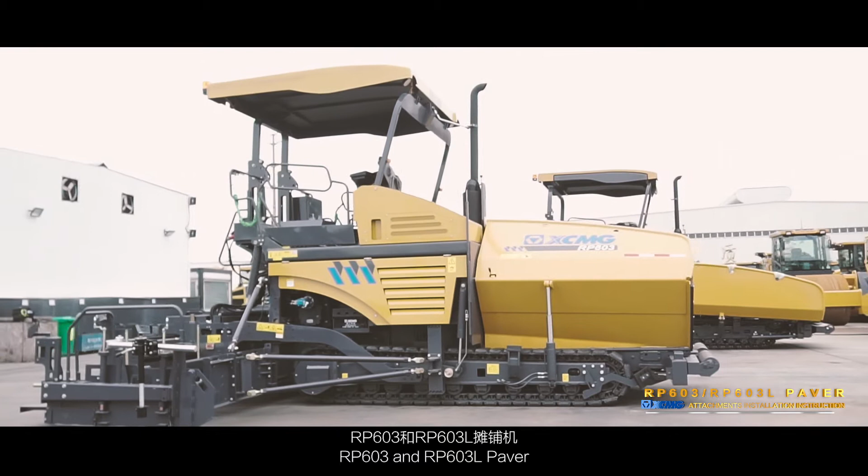Attachments Installation Instruction of XCMG PAVER RP603L. RP603 and RP603L PAVER use XCMG E475T hydraulic screed, which can be installed with bolt-on extensions as well as various optional attachments to achieve two kinds of paving width ranges, including 2.5 meters to 4.75 meters and 3.75 meters to 6 meters.

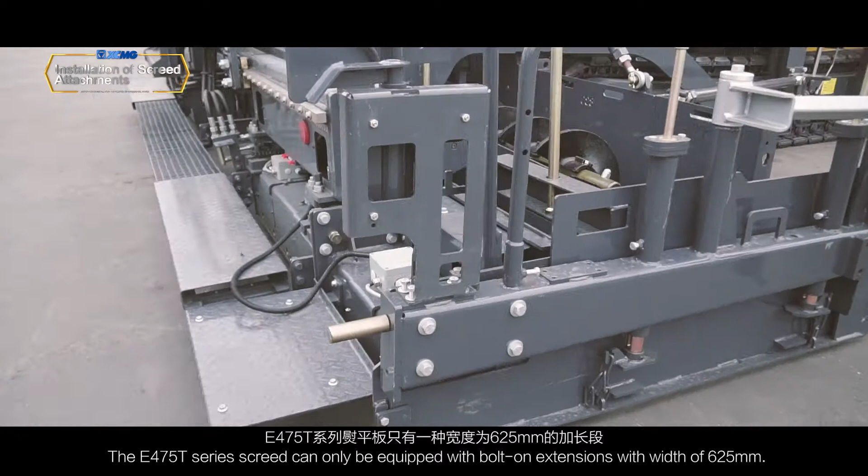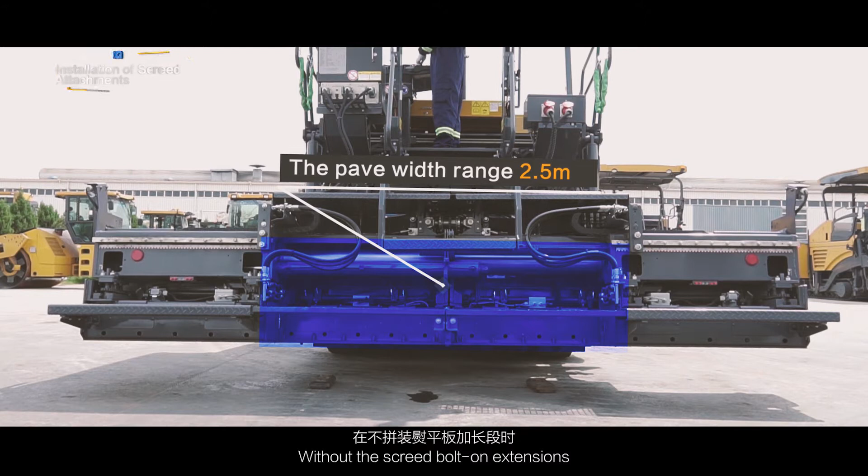Installation of screed attachments. The E475T series screed can only be equipped with bolt-on extensions with width of 625 millimeters. These 625 millimeter extensions can be installed on both right and left side of the main screed. Without the screed bolt-on extensions, the pave width range is from 2.5 meters to 4.75 meters.

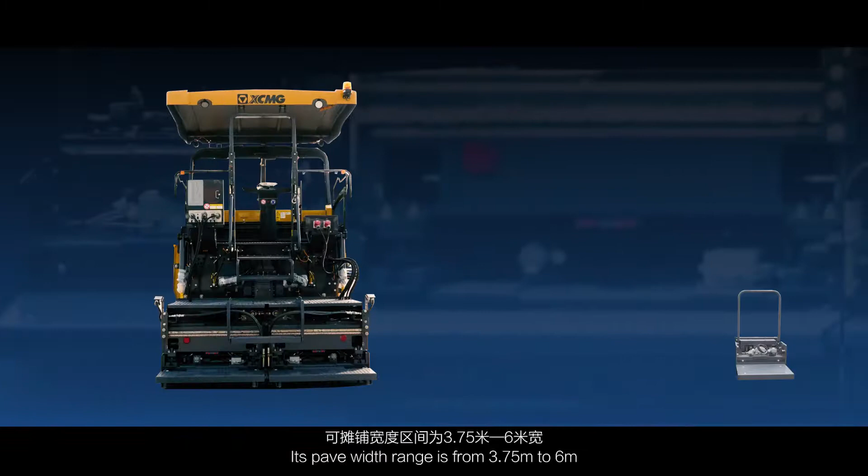E475T screed can reach maximum pave width of 6 meters with bolt-on extensions. Its pave width range is from 3.75 meters to 6 meters. Select screed extensions and related attachments according to required pave width.

Installation of screed bolt-on extensions. Stretch out the hydraulic extensions completely and lift the screed plate to about 3 centimeters above the ground and put wooden board under it. Ensure that the extension is only affected by its own gravity during the installation of screed extensions in order to facilitate the height adjustment of the screed base plate.

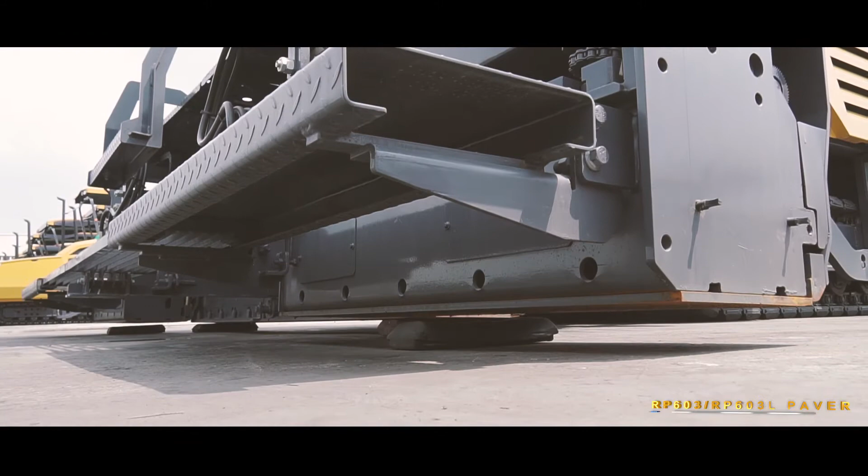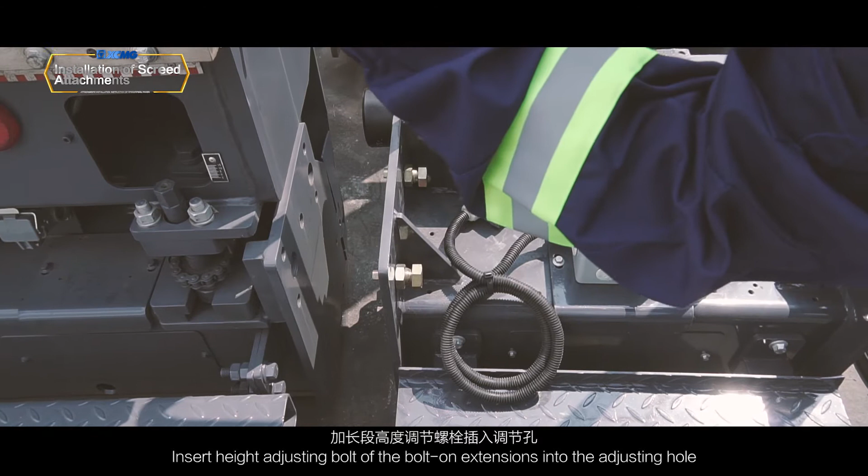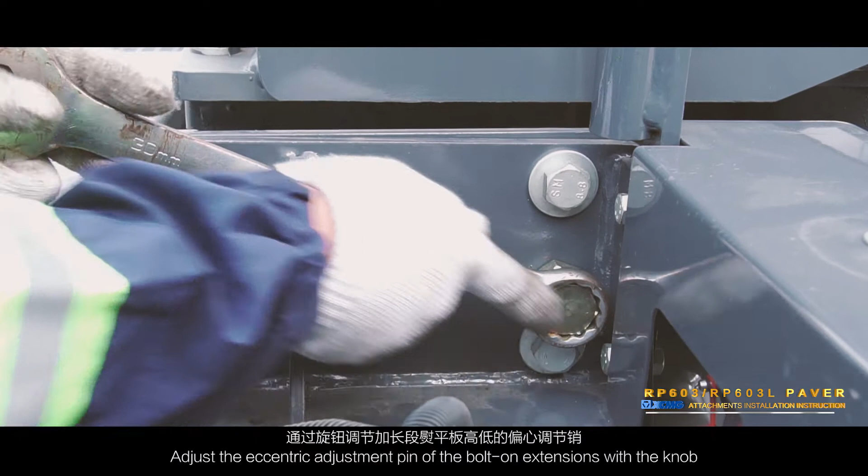Adjust the eccentric adjustment pin of the bolt-on extensions with the knob, so that bolt-on extensions are on the same plane as the front and rear base plate of the hydraulic extensions. Finally, tighten all the bolts which connect the bolt-on extensions and the hydraulic extensions.

Caution: due to different using frequency of the bolt-on extensions and hydraulic extensions, there will be thickness difference caused by the wear of base plate. Thus, it is necessary to compensate the thickness difference by adjusting the height adjustment device of the bolt-on extensions. Replace the failed screed base plate in time.

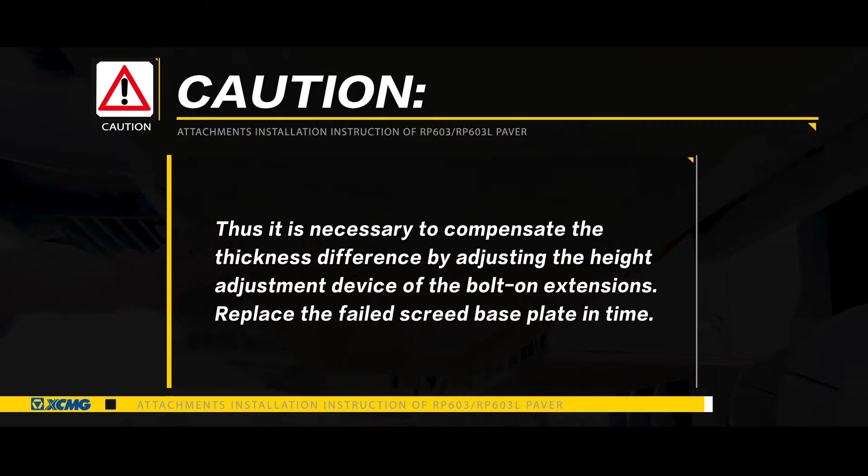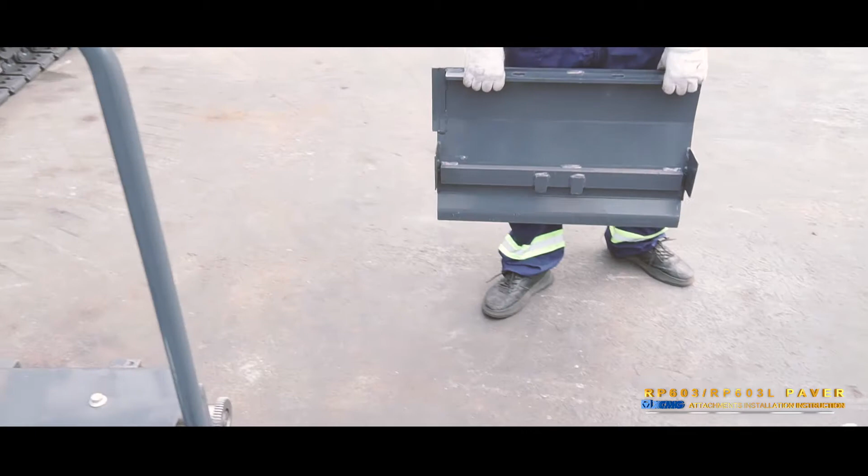Align the marking arrow on the nylon sleeve on the bolt-on extensions with the gap in the gear ring on the hydraulic extensions by turning the vibration shaft of the bolt-on extensions. Push the nylon sleeve inward to engage with the gear ring until the spacer pin pops out. Front baffle installation.

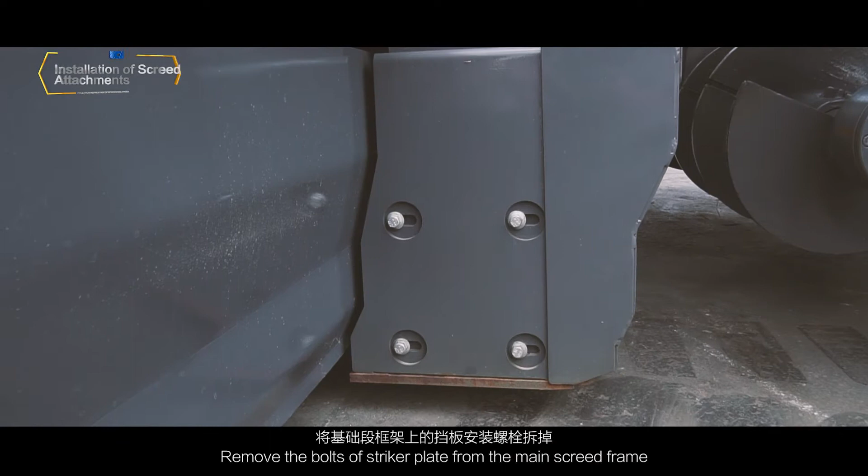Insert the plug of the electric heating cable on the screed into the electric heating socket on the hydraulic extensions and make it tight. Installation of striker plate. Remove the bolts of striker plate from the main screed frame.

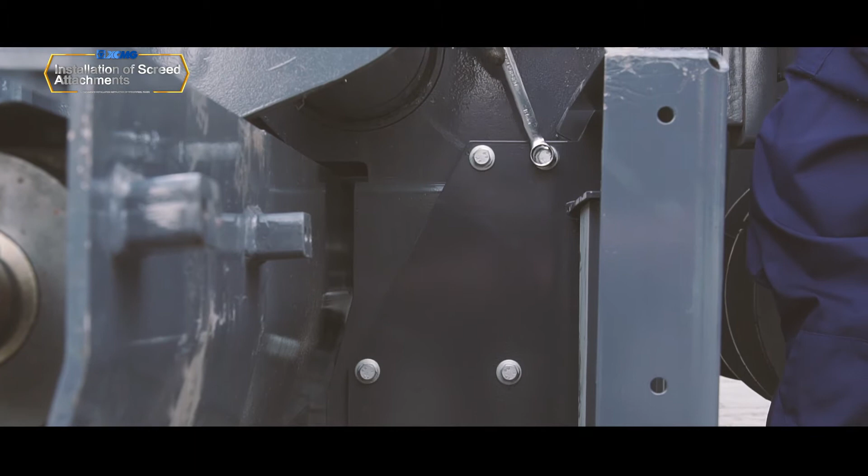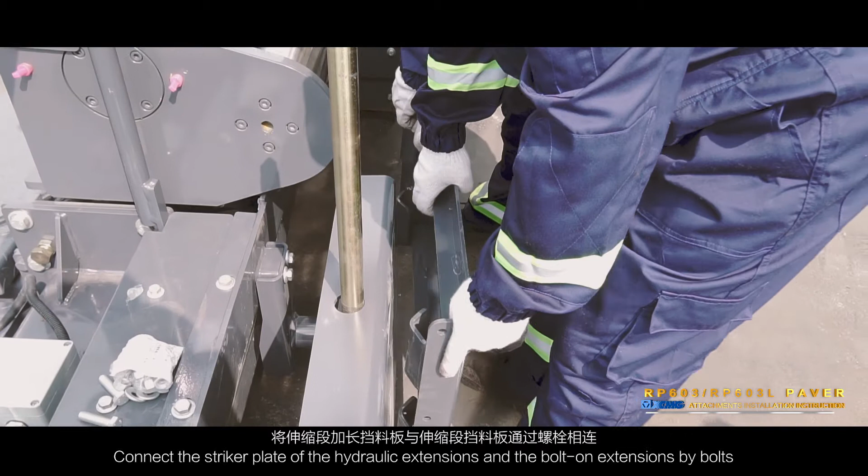Connect the striker plate of the hydraulic extensions to the frame of the main screed by bolts. Connect the striker plate of bolt-on extensions to the front plate of the bolt-on extensions by bolts. Connect the striker plate of the hydraulic extensions and bolt-on extensions by bolts. Demonstration of screed extension operation.

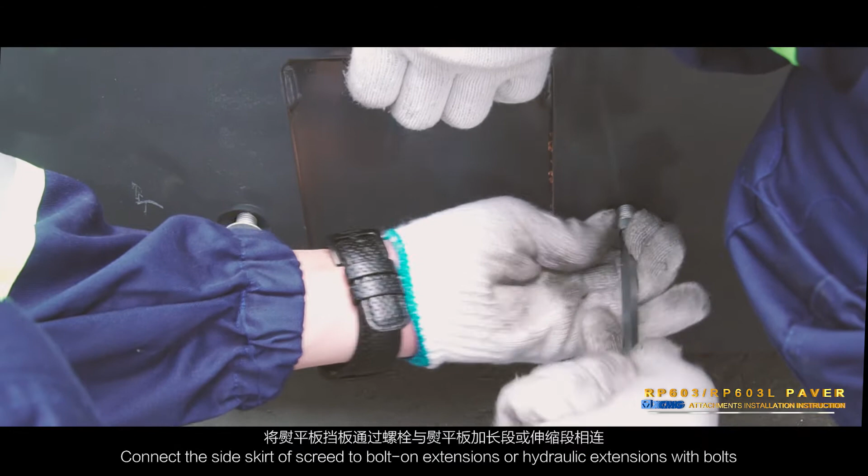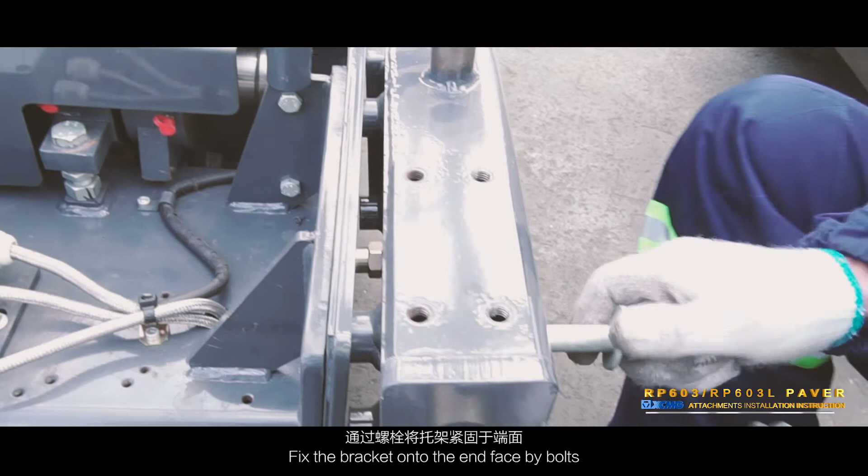Installation of the side skirt and bracket. Connect the side skirt of screed to bolt-on extensions or hydraulic extensions with bolts. Engage the bracket into the end face of the bolt-on extensions or hydraulic extensions through the hitch pin on it. Fix the bracket onto the end face by bolts.

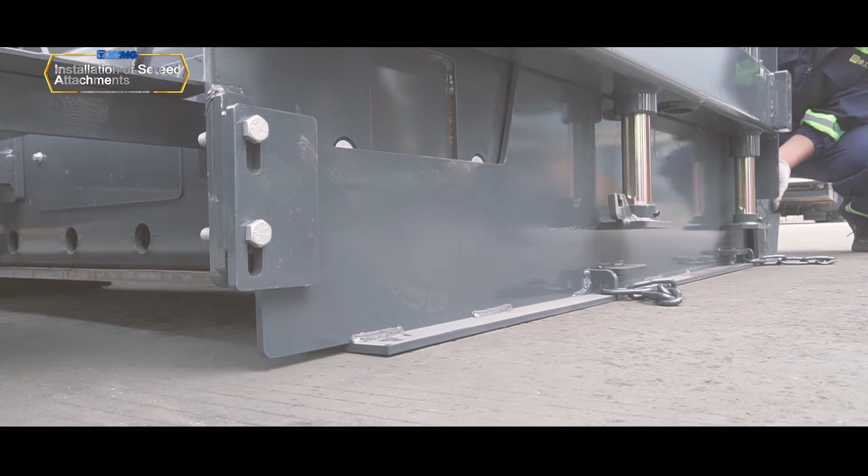Connect the installation slot pad with the bolt-on extensions or hydraulic extensions by bolts. Push the side skirt from front of bracket into bracket chute. Attach the chain to the adjustable chain holder on the bracket. The height of the movable side skirt can be adjusted by turning the rotary adjusting handle above the chaining seat.

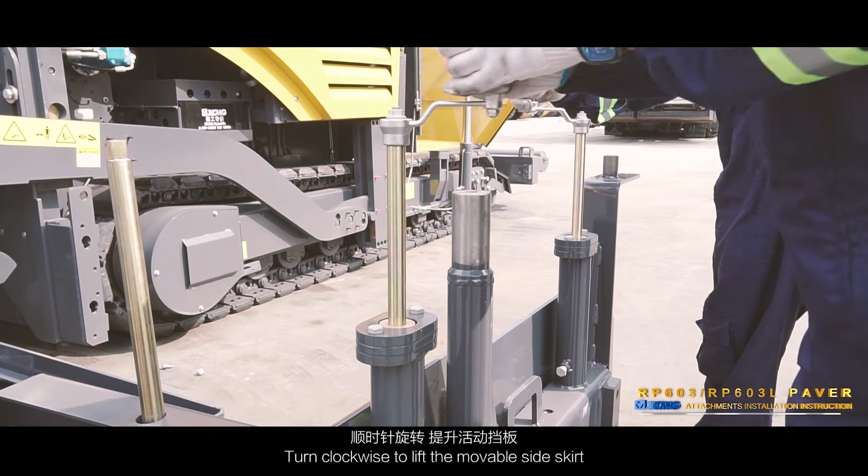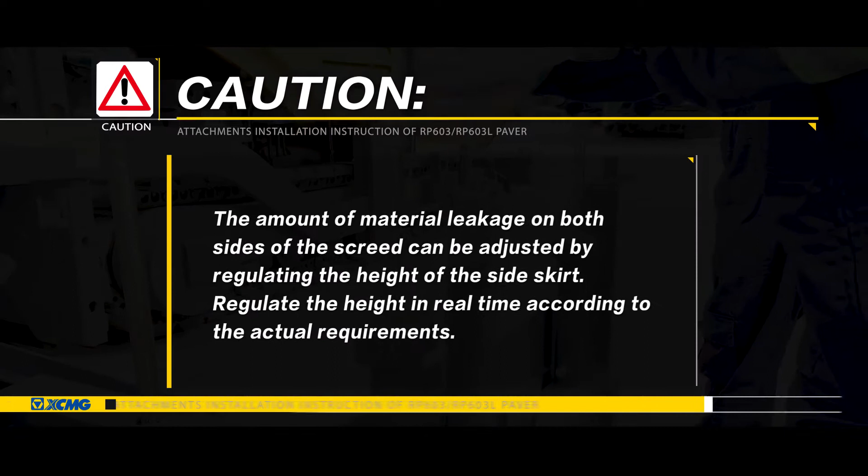Turn clockwise to lift the movable side skirt. Turn counterclockwise to lower the movable side skirt. Fix the rotary adjusting handle by adjusting the top thread. Caution: the amount of material leakage on both sides of the screed can be adjusted by regulating the height of the side skirt. Regulate the height in real time according to the actual requirements.

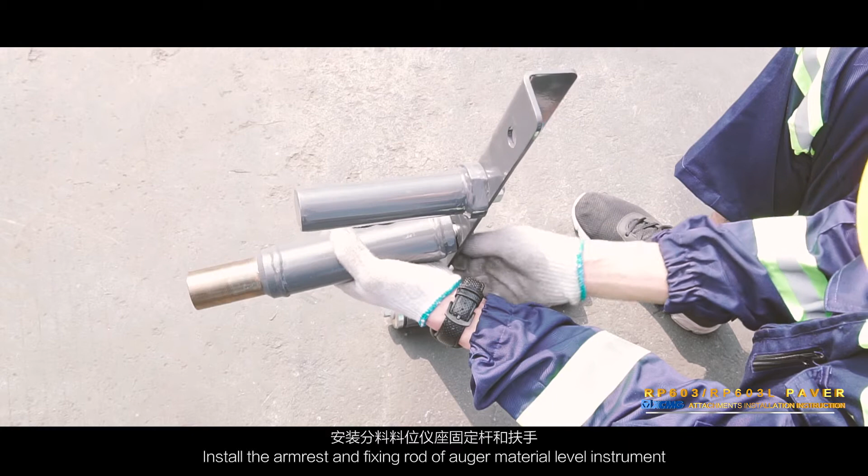Install the armrest and fixing rod of auger material level instrument. Remove the fixing rod from the material level instrument assembly frame. Screw the screws at the bottom of the rod into the mounting screw holes in the front of the bracket and tighten them. Insert the armrest into the corresponding plug and bolt it. Connect screed control box holder to the rear part of the bracket by screws.

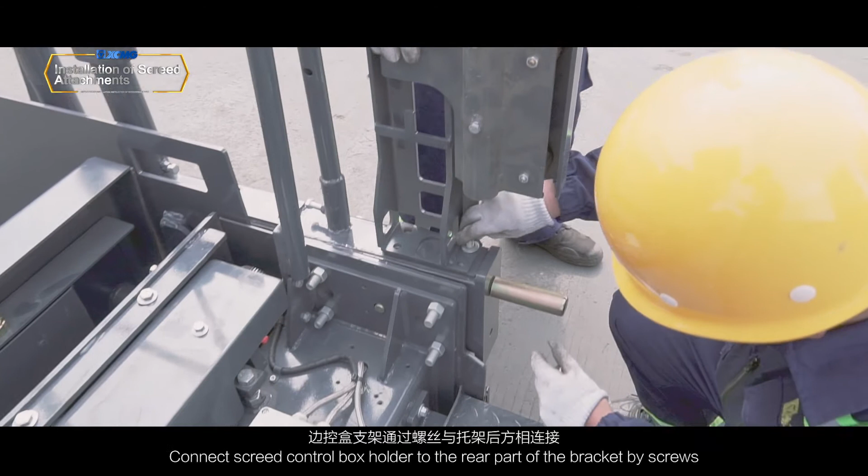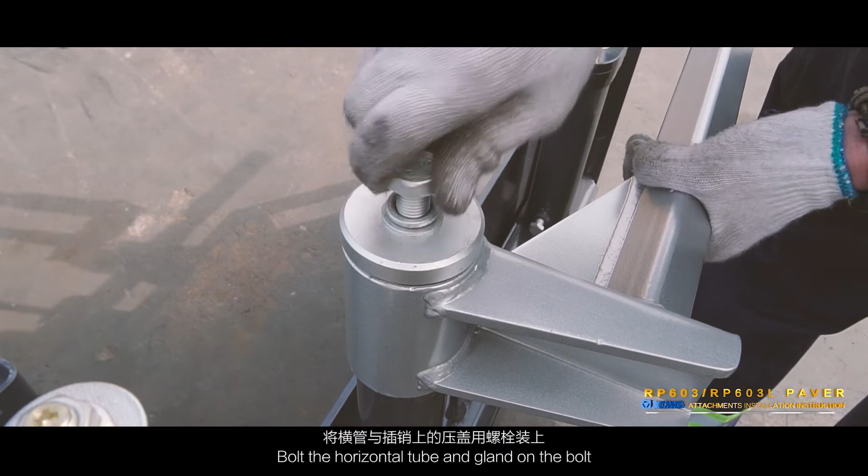Place the horizontal tube on the corresponding plug on the bracket. Make sure that the horizontal tube faces forward and can be turned towards the outside of the Screed. Bolt the horizontal tube and gland on the bolt. Adjust the gland tightness by adjusting the bolts. Let the horizontal tube at a suitable rotational tightness.

Caution: the tightness of the horizontal tube of leveling instrument shall keep the leveling instrument firm under Screed vibration. The horizontal tube can be rotated manually to adjust the relative position of the leveling instrument and the leveling reference when necessary.

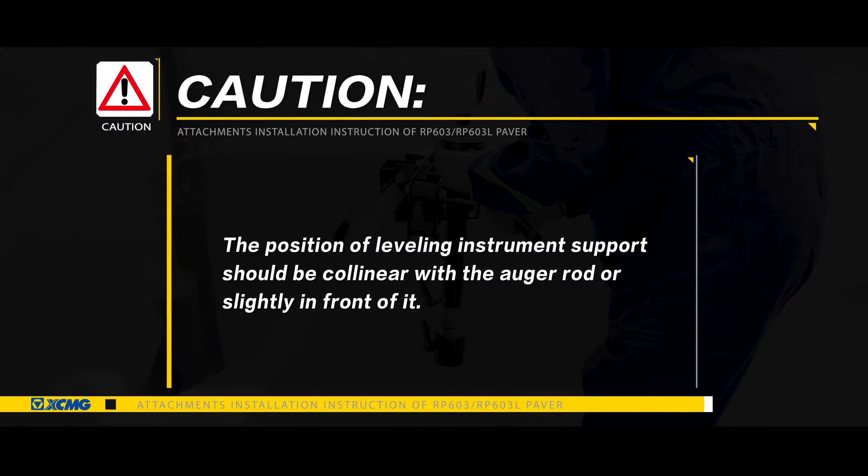Install the leveling instrument support on the horizontal tube of the leveling instrument, and fix it by the rocker handle. Caution: the position of leveling instrument support should be collinear with the Auger rod or slightly in front of it.

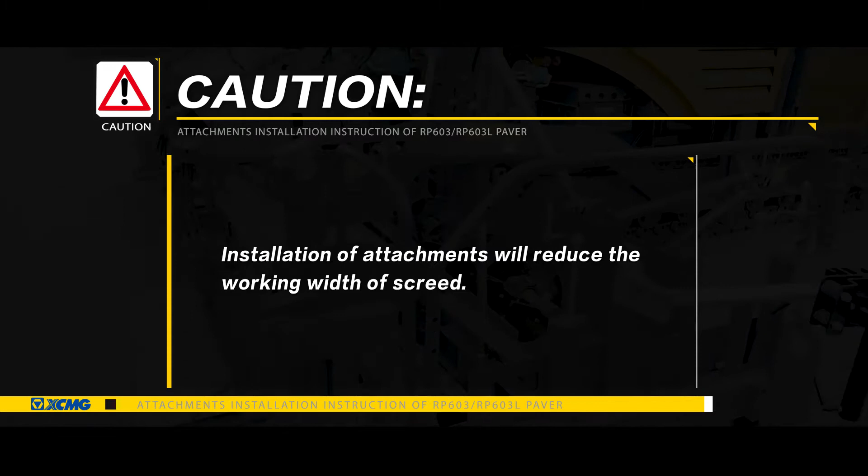Installation of PAVER attachments. Select PAVER attachments based on the actual width. Caution: installation of attachments will reduce the working width of Screed. Attachments installation for pave width of 4.75 meters to 6 meters.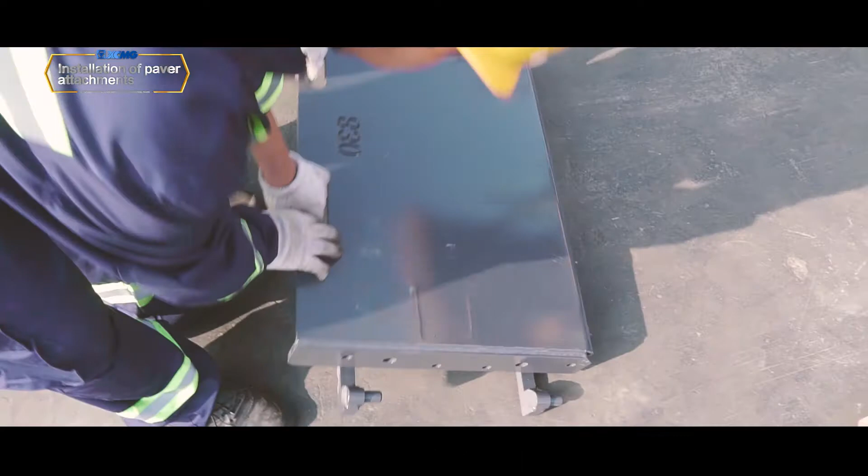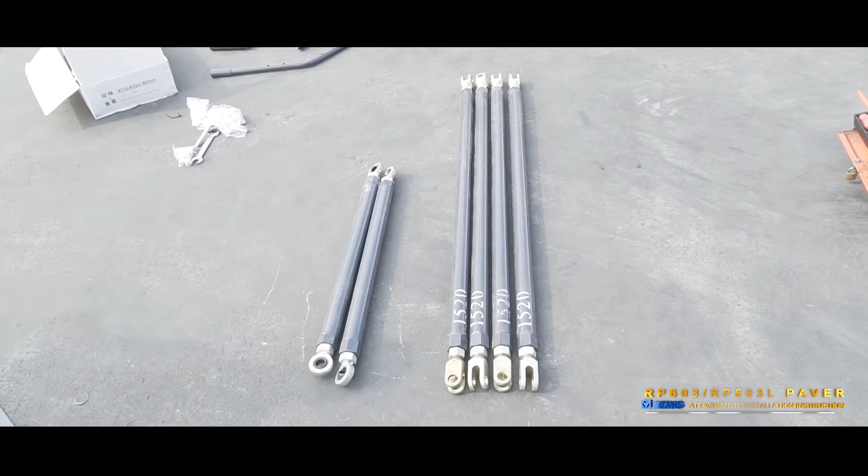Auger rod configuration: auger rod of main Screed, 750 mm lengthening shaft, 1202 mm lengthening shaft. Baffle plate configuration: transition baffle plate, 830 rotary baffle plate, 250 mm front baffle plate, 500 mm front baffle plate. Pull rod configuration: horizontal pull rod, side pull rod.

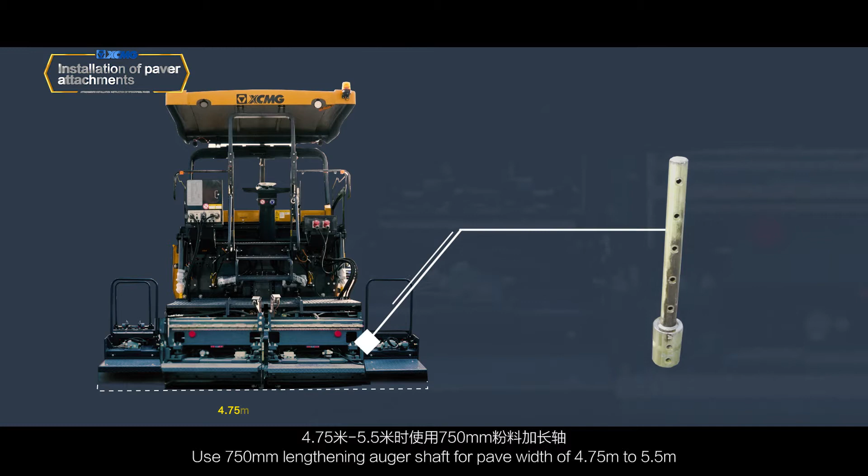Select and install the lengthening auger shaft according to the actual pave width requirements. Use 750 mm lengthening auger shaft for pave width of 4.75 meters to 5.5 meters. Use 1202 mm lengthening auger shaft for pave width of above 5.5 meters. Remove the fan blades and axle shaft sleeve at the end of the auger rod of main Screed.

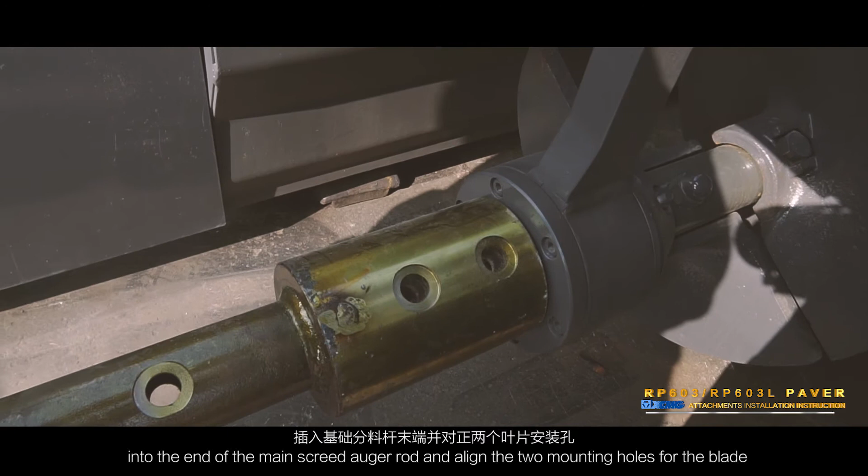Insert the thicker and hollow end of the selected lengthening auger shaft into the end of the main Screed auger rod and align the two mounting holes for the blade. Install the blades of lengthening auger shaft. Install the AR42-1 bridge blades on the connection between right lengthening auger shaft and main Screed auger rod with bolts.

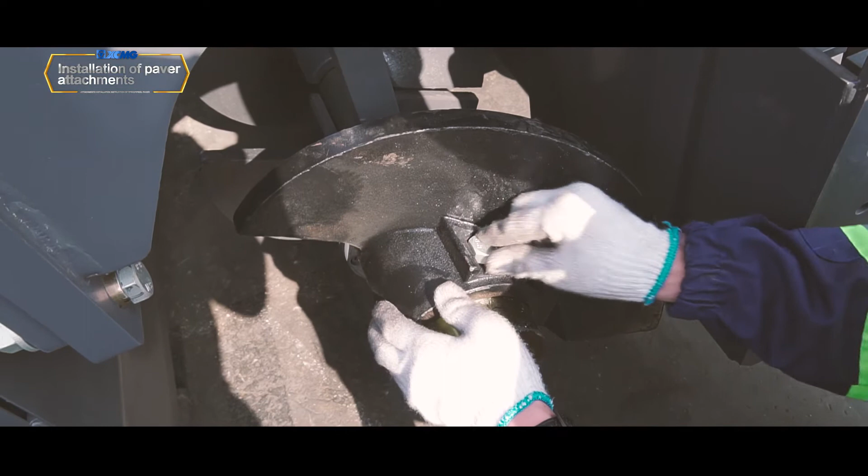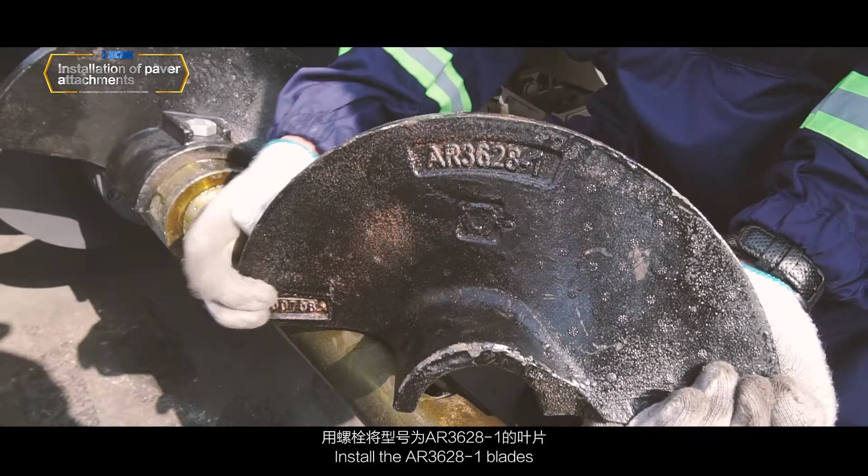Install the AR42-1 bridge blades on the connection between left lengthening auger shaft and main Screed auger rod with bolts respectively. Caution: the model mark shall face inward. Install the AR3628-1 blades separately in the remaining positions of the right lengthening auger shaft.

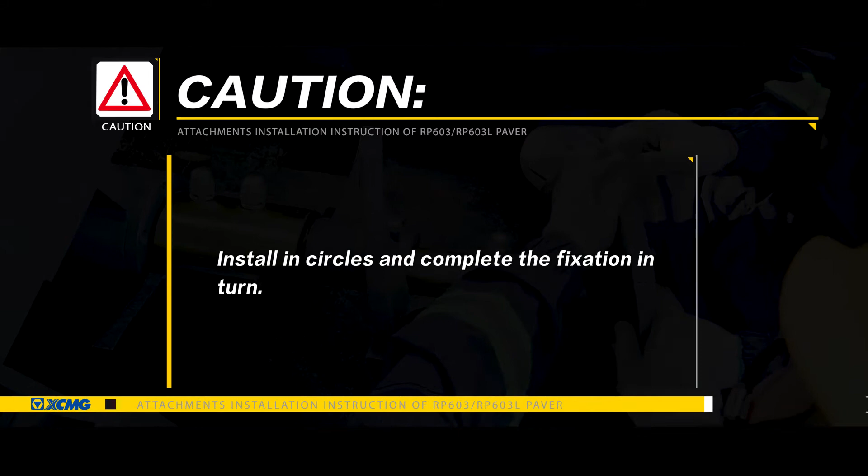Install the AL3628-1 blades separately in the remaining positions of the left lengthening auger shaft. Caution: install in circles and complete the fixation in turn. Hook the 830 mm rotary front baffle plate hook to the transition baffle and install it with bolts. Install the tie rod holder.

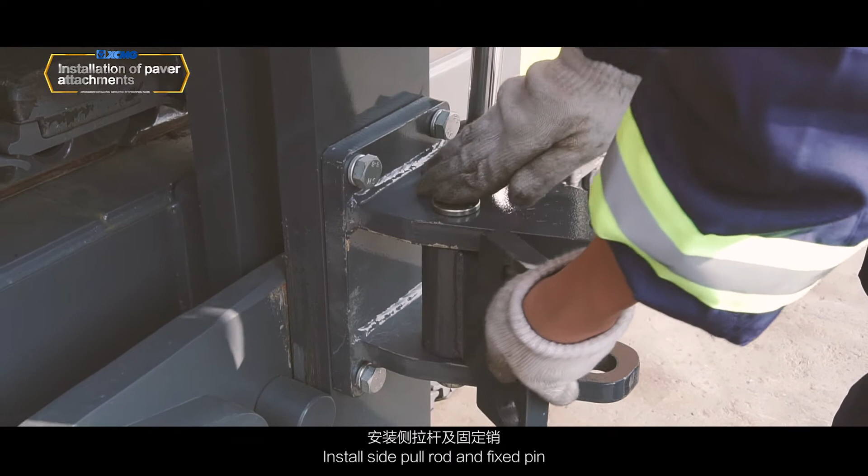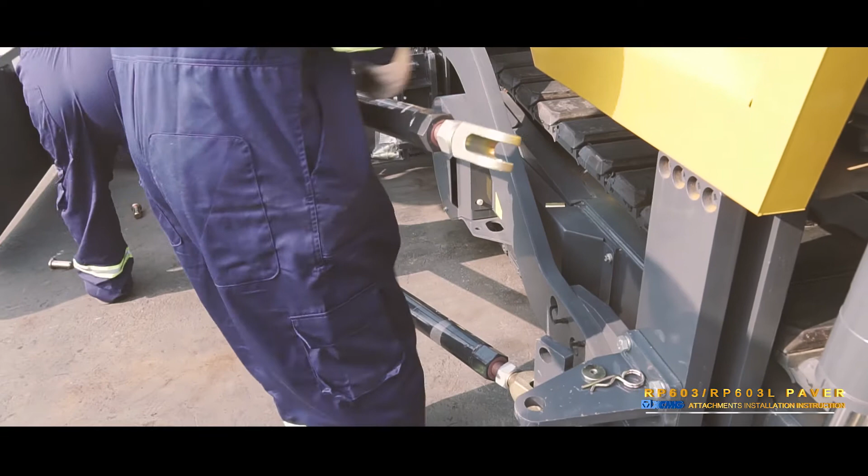Install side pull rod and fixed pin. Caution: the fixing pins are installed with self-locking nuts, and the direction of the fixing pins should be the same as the direction of the fixing pins on the PAVER.

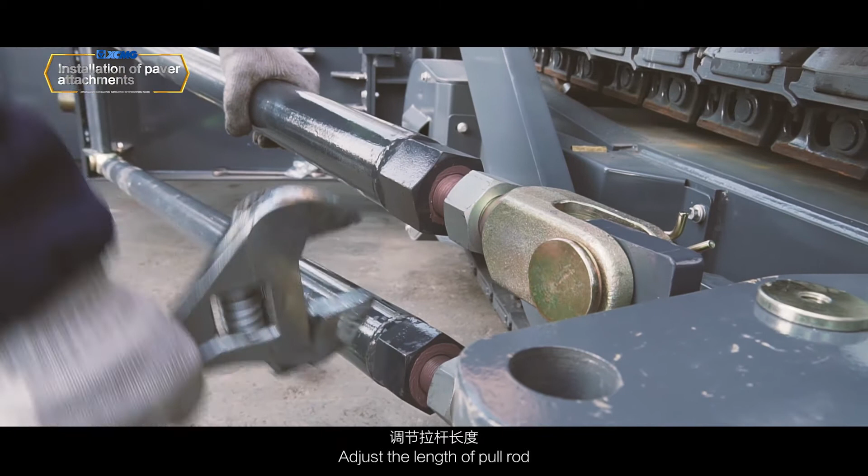Adjust the length of pull rod. Make the front striker plate in a level position with uniform force. Tighten the length adjustment enclosed bus bar of the pull rod. Install horizontal pull rod and fixed pin.

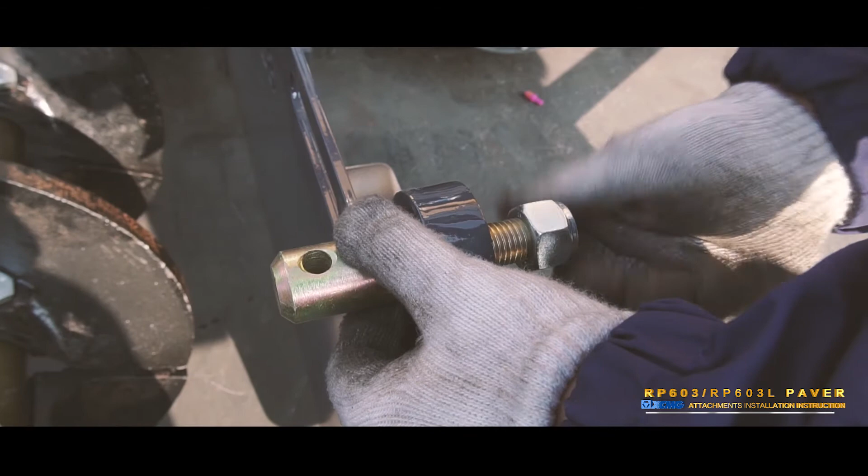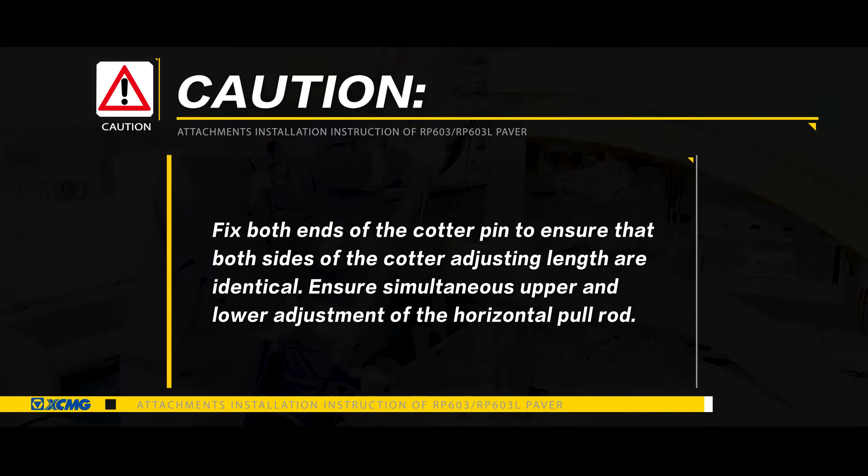And adjust the length of the pull rod. Caution: fix both ends of the cotter pin to ensure that both sides of the cotter adjusting length are identical. Ensure simultaneous upper and lower adjustment of the horizontal pull rod. Ensure identical front and rear width of the front material groove, and that the groove is in a level position with uniform force. Tighten the length adjustment enclosed bus bar of the pull rod.

According to the actual pave width requirement, select whether to install 250mm, 500mm front baffle plate or not. Install and fix them to the 830mm rotary baffle with bolts.

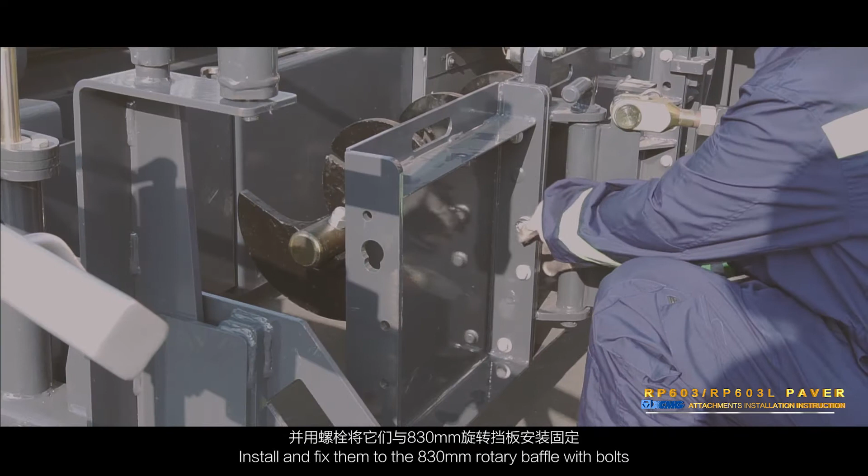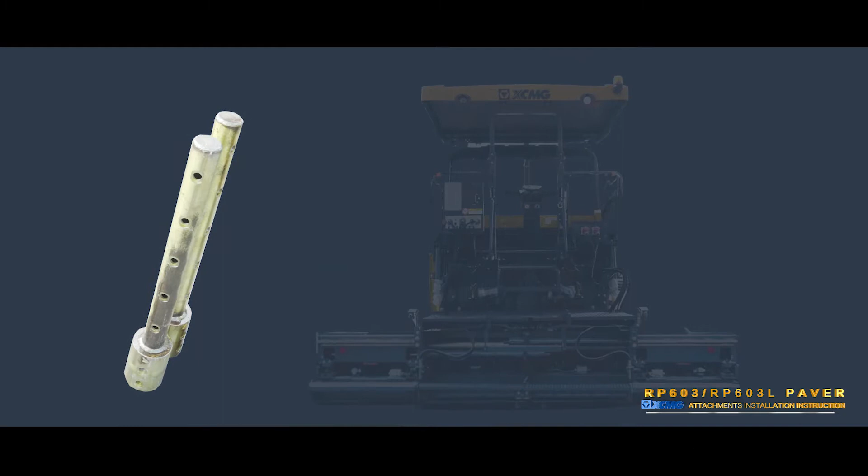Attachments installation for paving 2.5 to 4.75 meters. Auger rod configuration: auger rod of main screed, 500mm lengthening shaft or 750mm lengthening shaft. Baffle plate configuration: transition baffle plate, 250mm front baffle plate, 500mm front baffle plate.

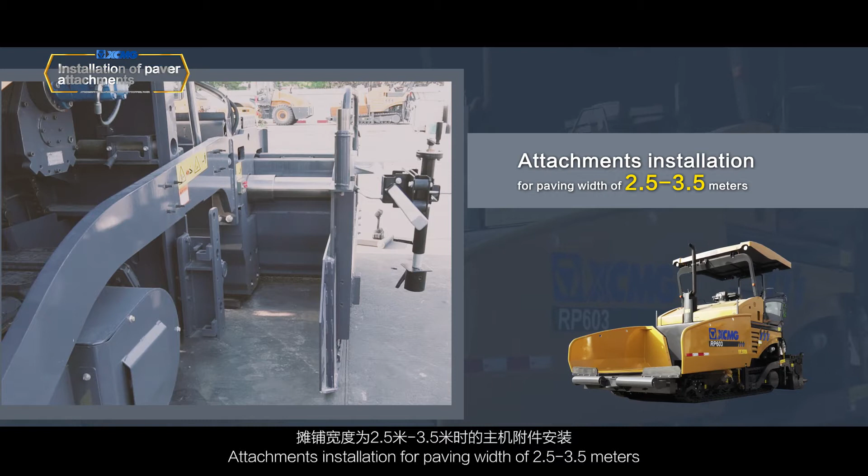Attachments installation for paving width of 2.5 to 3.5 meters. In this case, no need to install paver attachments. Attachments installation for paving width of 3.5 to 4 meters. In this case, a 250mm front baffle shall be installed.

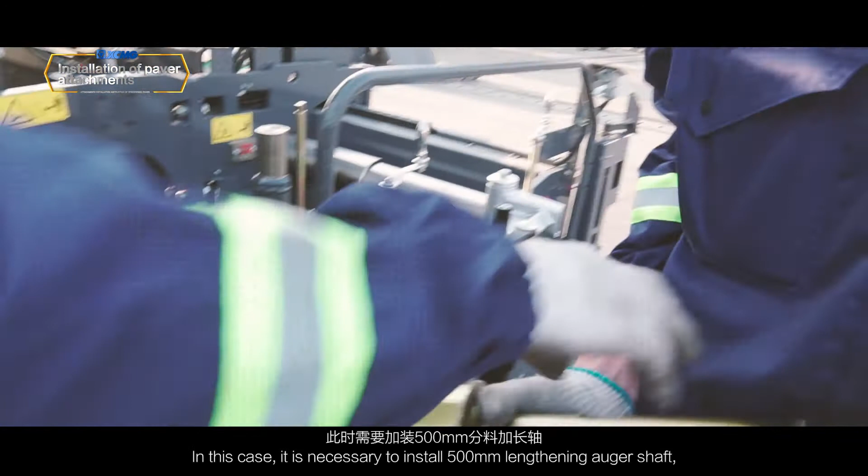Attachments installation for paving width of 4 to 4.5 meters. In this case, it is necessary to install 500mm lengthening auger shaft, hydraulic extensions, 500mm front baffle plate.

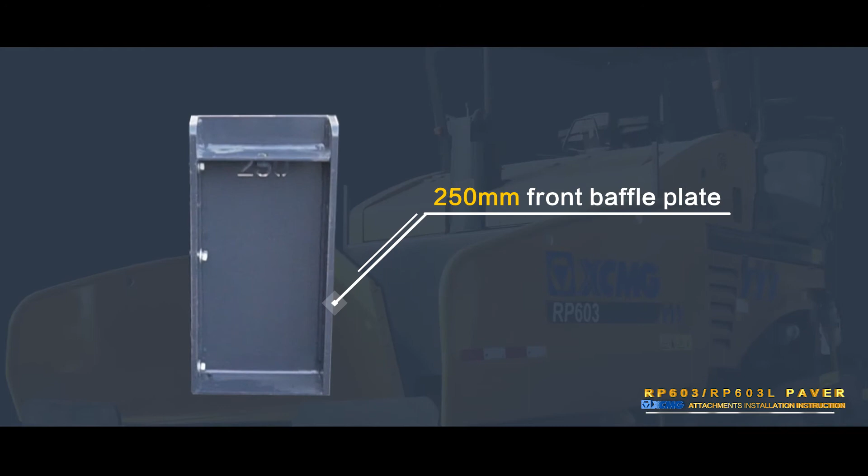Attachments installations for pave width of 4.5 to 4.75 meters. In this case, it is necessary to install 500mm lengthening auger shaft or 750mm lengthening auger shaft, 250mm front baffle plate, and 500mm front baffle plate and striker plate of hydraulic extensions.

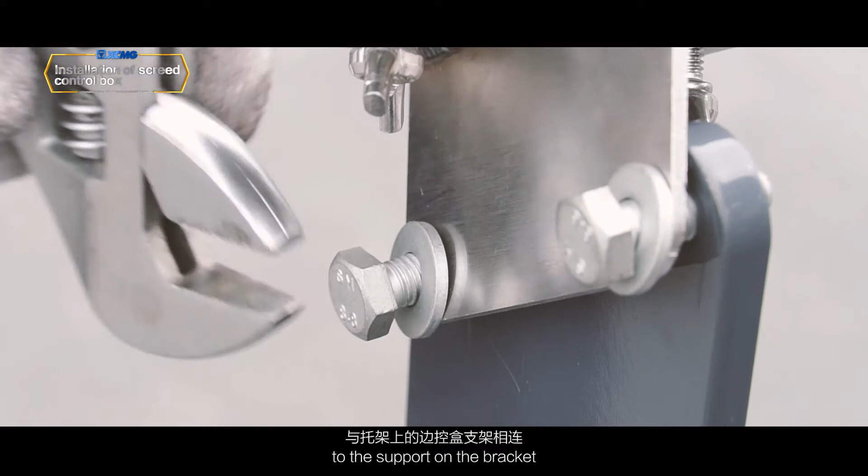Installation of Screed control box. Bolt the fixed plate of Screed control box to the support on the bracket. Insert the Screed control box into the fixed plate and adjust the top thread under the fixed plate to secure the Screed control box. Connect the Screed control box to the socket connector on the hydraulic extensions via the connecting wire.

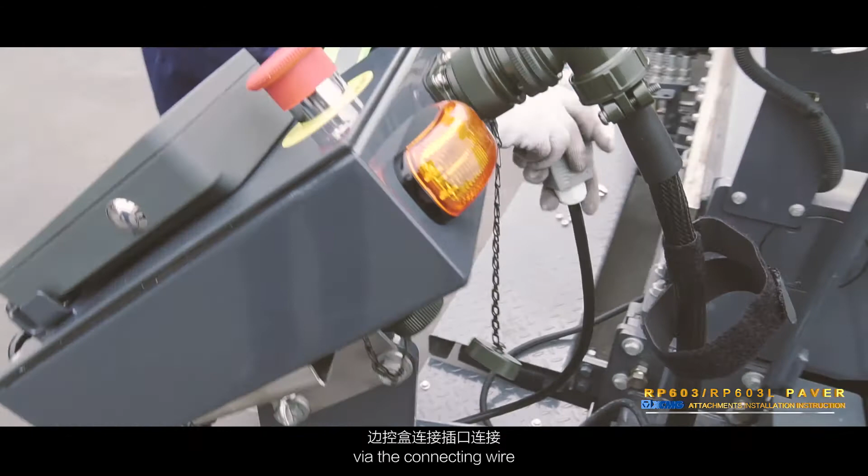Caution: the disassembly and assembly of the Screed control box can only be carried out while the machine powers off. Avoid loose connection.

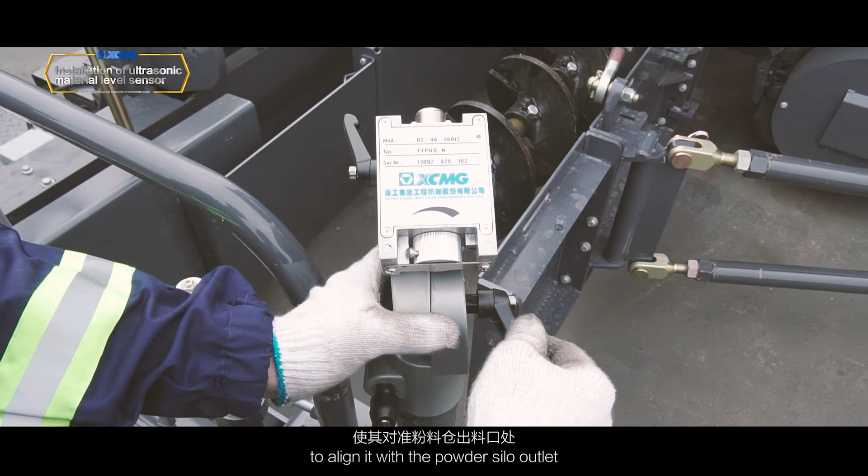Installation of ultrasonic material level sensor. Insert the mounting base of ultrasonic level sensor into the fixed rod on the bracket. Insert the ultrasonic level sensor into the mounting base. Adjust the beam angle of the ultrasonic level sensor to align it with the powder silo outlet, and tighten the handle on the ultrasonic level sensor mounting base. Secure the position angle of the ultrasonic level sensor.

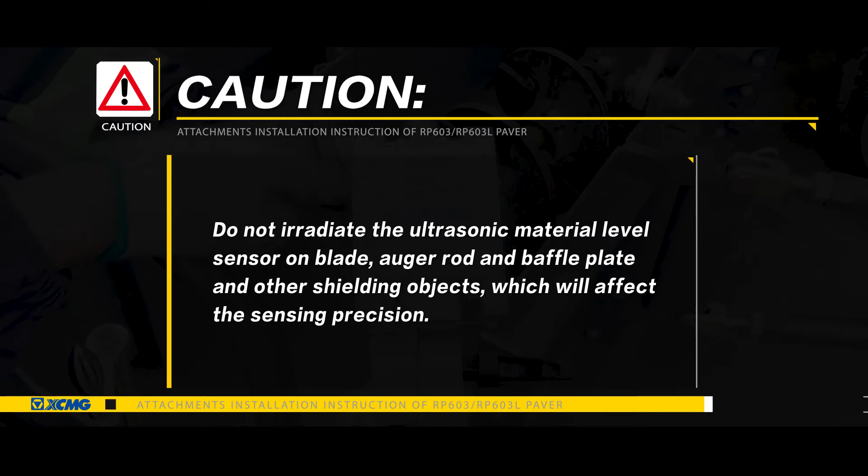Caution: do not irradiate the ultrasonic material level sensor on blade, auger rod, baffle plate and other shielding objects, which will affect the sensing precision. Use its own spiral line to connect the ultrasonic level sensor to the socket on the Screed control box. Caution: the disassembly and assembly of the ultrasonic material level sensor can only be carried out while the machine powers off. Avoid loose connection.

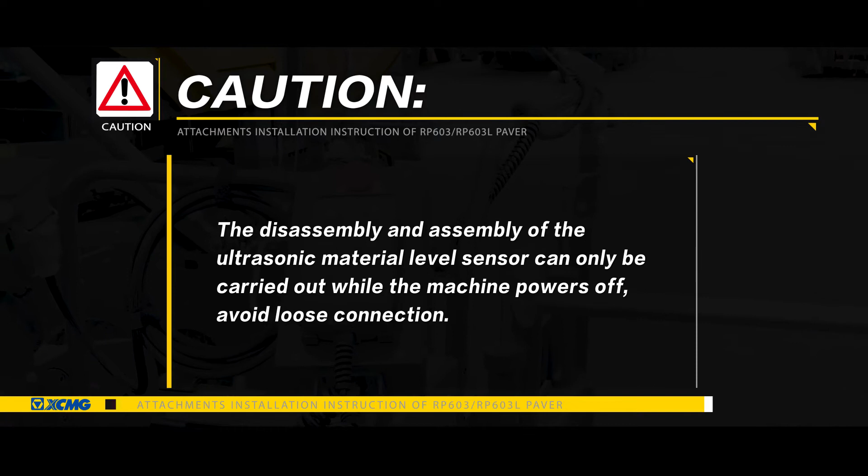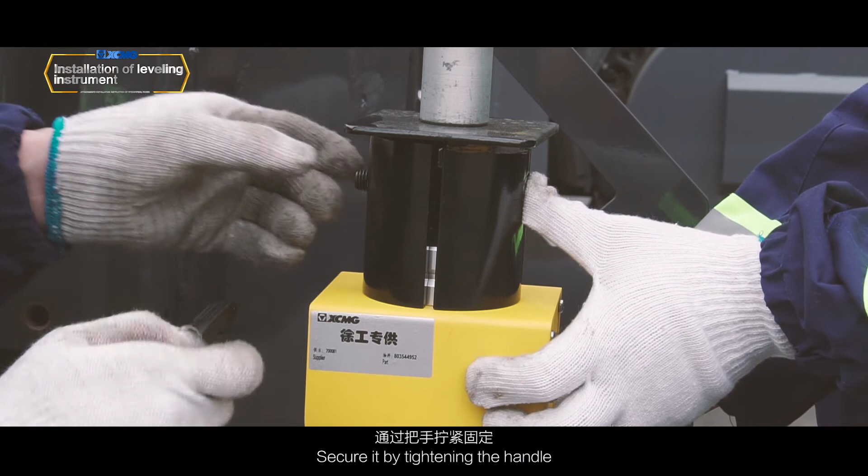Installation of leveling instrument. Install the leveling instrument at the mounting area under the leveling instrument bracket. Secure it by tightening the handle. The leveling instrument shall face the rear of the screed. Use its own spiral line to connect the leveling instrument to the socket on the Screed control box.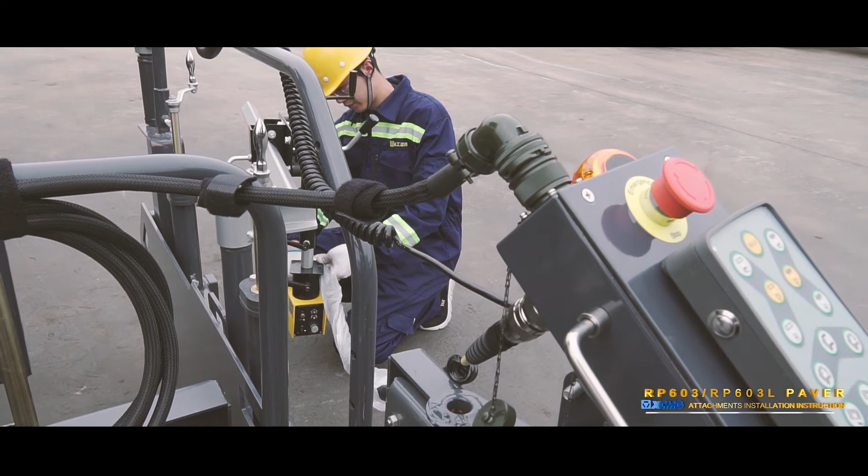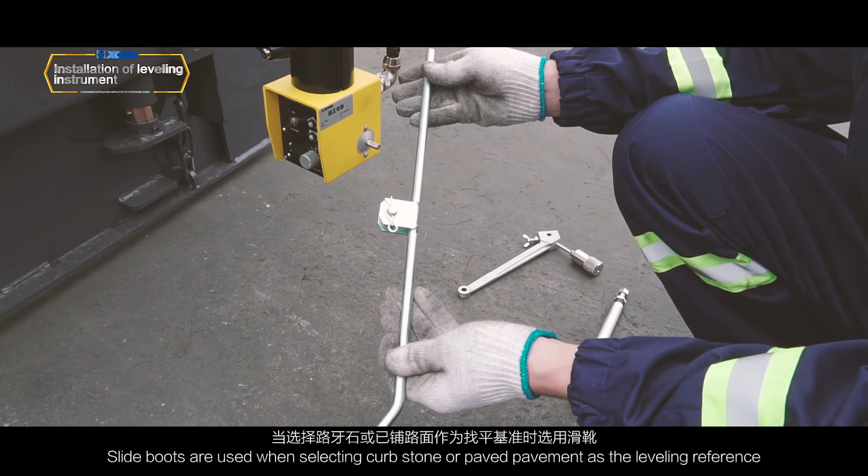Caution: the disassembly and assembly of the leveling instrument can only be carried out while the machine powers off. Avoid loose connection. Select to install slide boot or slide bar. Slide boots are used when selecting curbstone or paved pavement as the leveling reference. Slide bars are used when selecting steel wire or aluminum alloy beam as the leveling reference.

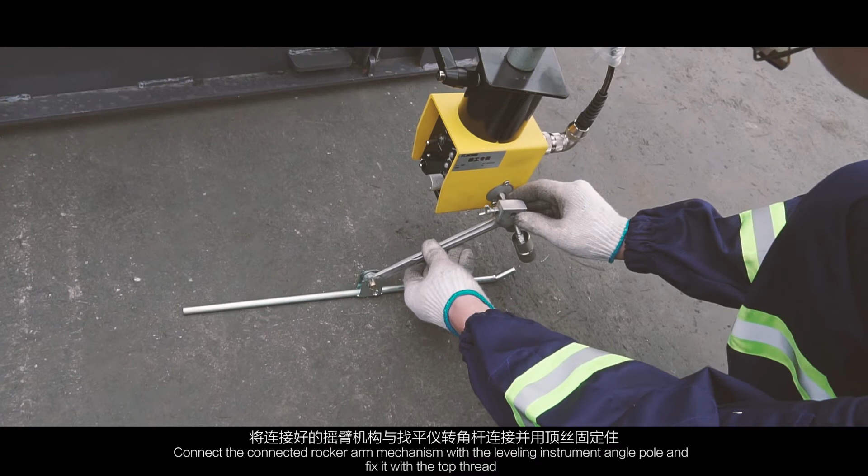Connect the slide boot or slide bar to the rocker arm of leveling instrument and counterweight hammer. Connect the connected rocker arm mechanism with the leveling instrument angle pole and fix it with the top thread. Adjust the counterweight hammer so that the rocker arm can sag naturally.

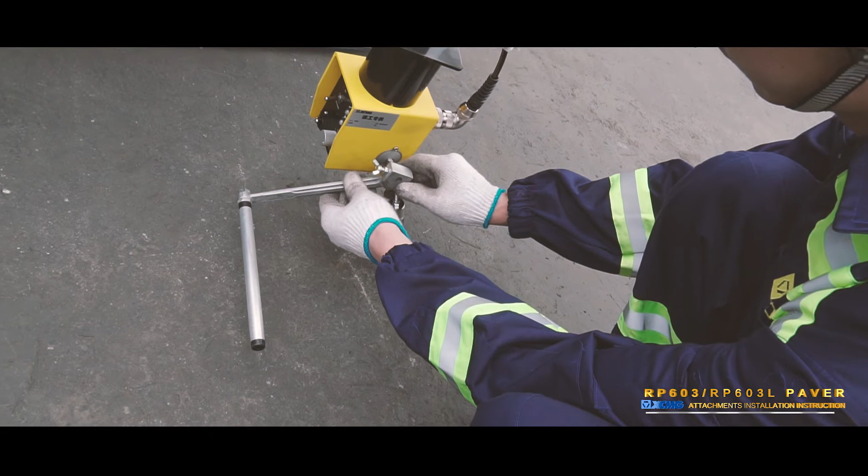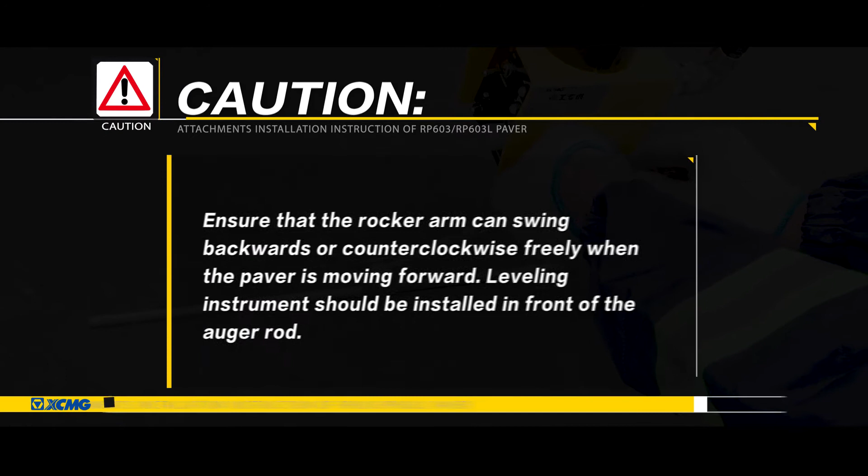Caution: ensure that the flat side of the angle pole of the leveling instrument faces the rear of the paver. Ensure that the rocker arm can swing backwards or counterclockwise freely when the paver is moving forward. Leveling instrument should be installed in front of the auger rod.

Height adjustment of screed. The screed needs to be adjusted after the attachment is installed. Adjustment of the height difference between the hydraulic extensions and main screed. Height adjustment device of the extensions. It is mainly used to fit the height of the hydraulic extension to the height of the main screed.

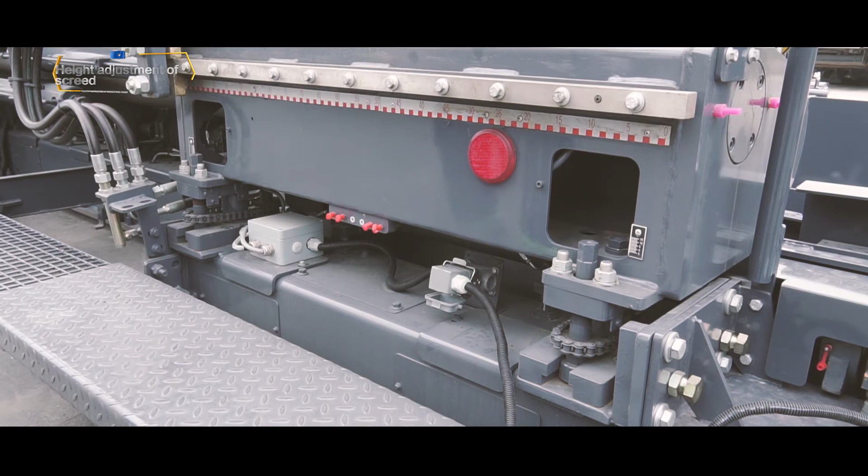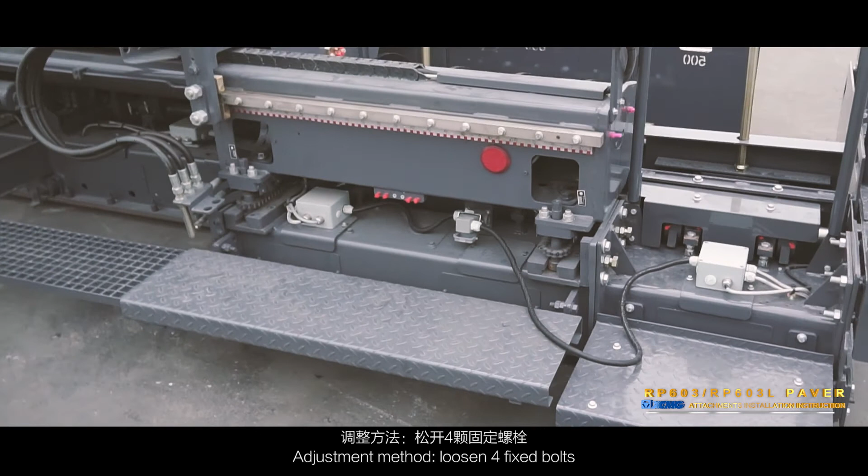Adjust two adjustment levers on one side of the screed hydraulic extension frame. Make the bottom surface of the base plate of extensions in the same plane with the bottom surface of the main screed base plate. Avoid the deviation of paving thickness. Height adjustment shall be carried out during paving. Adjustment method. Loosen 4 fixed bolts.

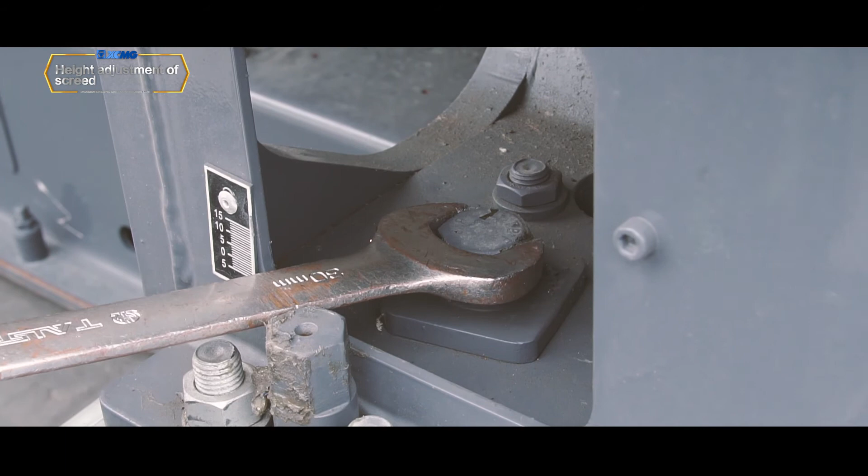Use a wrench to turn the lever connected to the sprocket. The hydraulic extension rises relative to the main screed when turning counterclockwise, and declines conversely. Tighten the bolts after adjustment. First, pre-adjust it to position of 7 mm before paving. Observe by adjusting the ruler on the device. Caution: two height adjustment devices on the same hydraulic extension must have the same adjustment range.

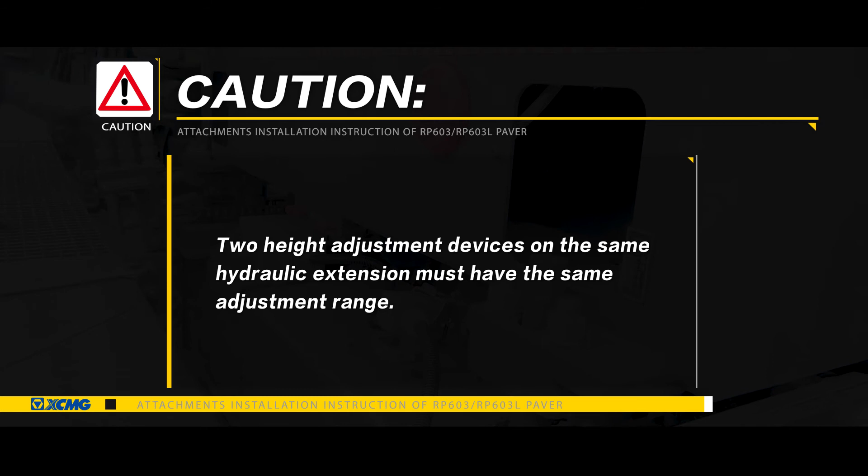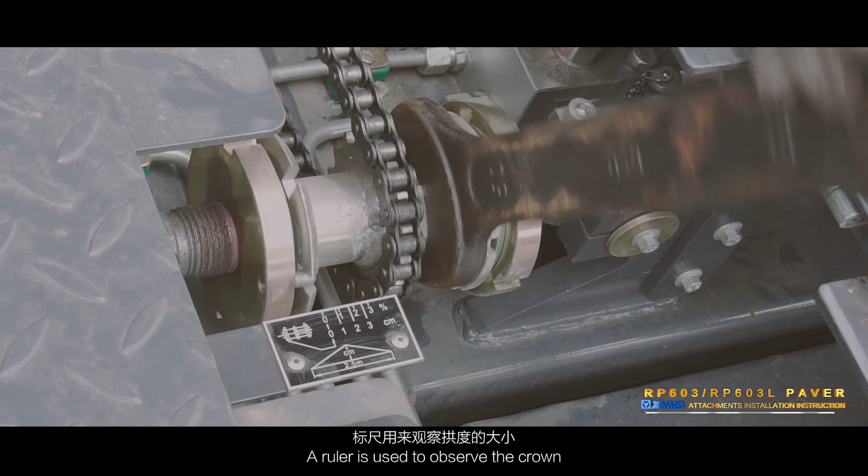Screed crown adjustment. Screed crown can be adjusted through the crown adjusting device at the central junction of the screed. Adjust crown by turning the adjusting bolt. A ruler is used to observe the crown. Grease every lubrication point after installation.

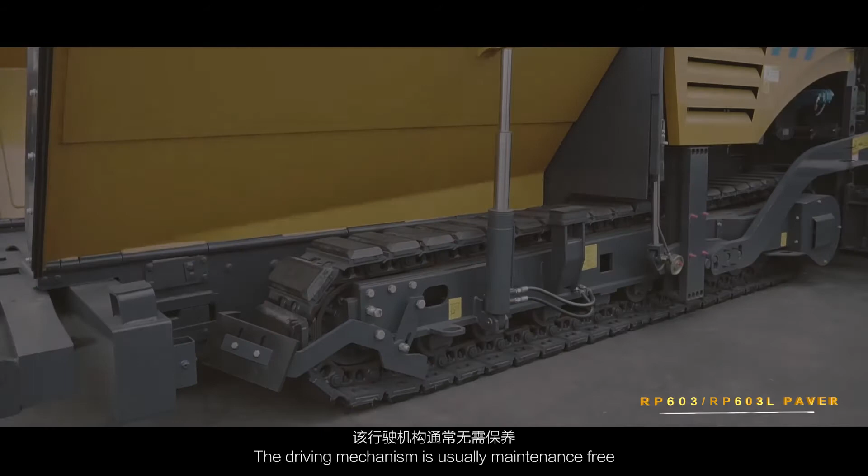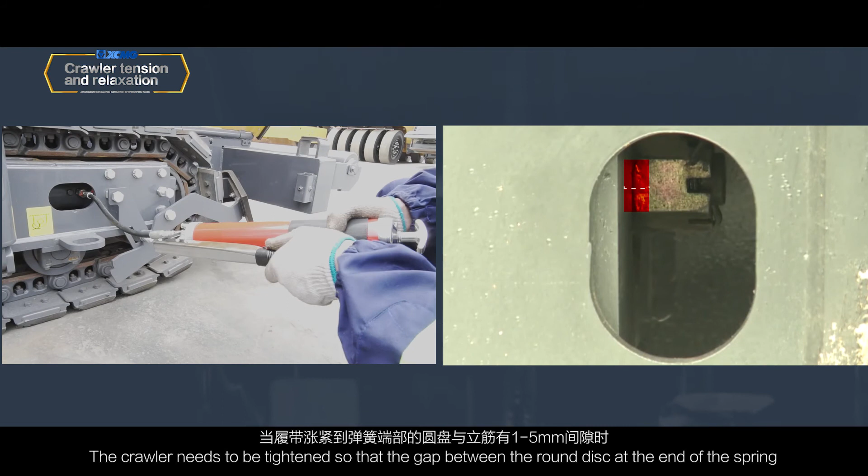Crawler tension and relaxation. The driving mechanism is usually maintenance-free. Check frequently if the crawler is tensioned. Specific method is as follows. Fill grease with grease gun. The crawler needs to be tightened so that the gap between the round disc at the end of the spring and the reinforcement reaches 1 to 5 mm.

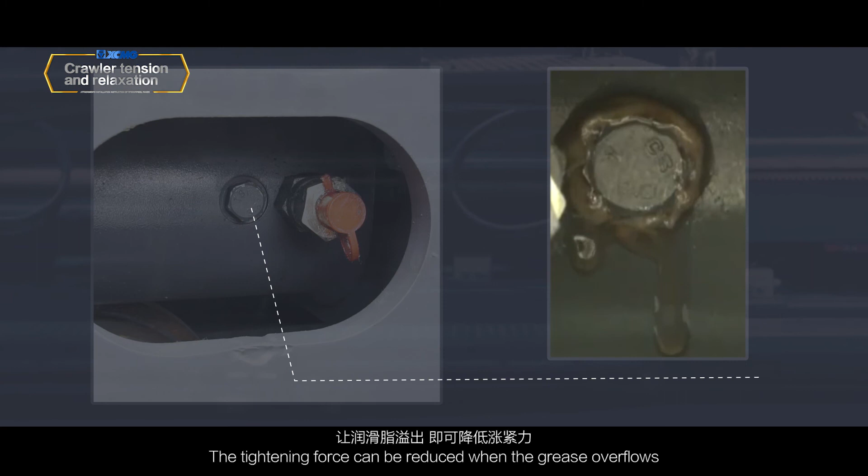Crawler tensioning is completed. To loosen the crawler, simply unscrew the hex nut next to the check valve. The tightening force can be reduced when the grease overflows. Caution: when relaxing the crawler, all the hexagonal bolts shall not be removed at one time. Otherwise, excessive pressure may cause injuries.

Caution: check periodically whether the bolt M18×1.5×70 connecting the crawler and the machine is loose or not. Tighten or replace it in time with a tightening torque of 180 newton meters.